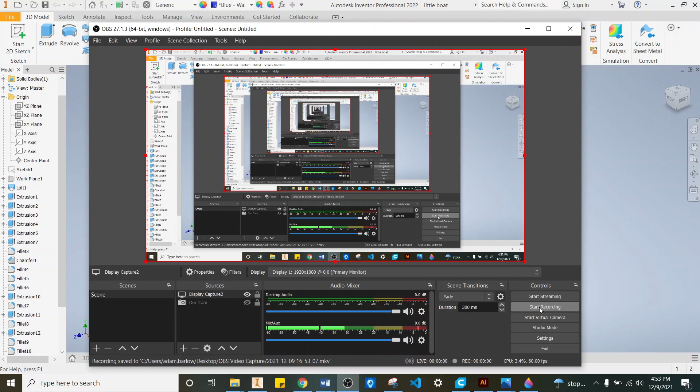All right, so this is step 3 in the 3D modeling project, or the 3D print project. I've made a little blue tugboat in Inventor, and I'm going to make this pretty small. It's about 2 inches in length, so it's just like a little knick-knack.

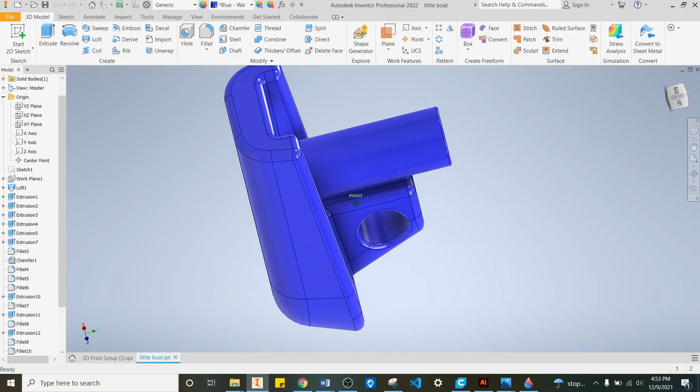So we're going to go File, New, and start a drawing. Just real quick, I'm going to make my mouse a little bit bigger for you.

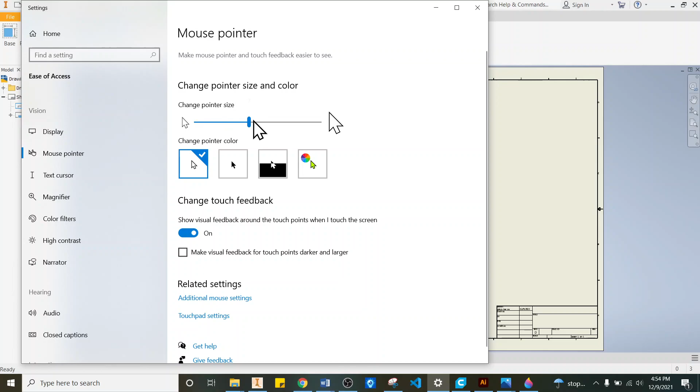Okay, so I've got this sheet that's defaulted here. It's automatically going to open up a size D, and that's way too big for what I'm doing. So what I'm going to do is go over to the left here in the model browser, right-click on Sheet 1, and say Edit Sheet. I'm going to change this from size D to size A.

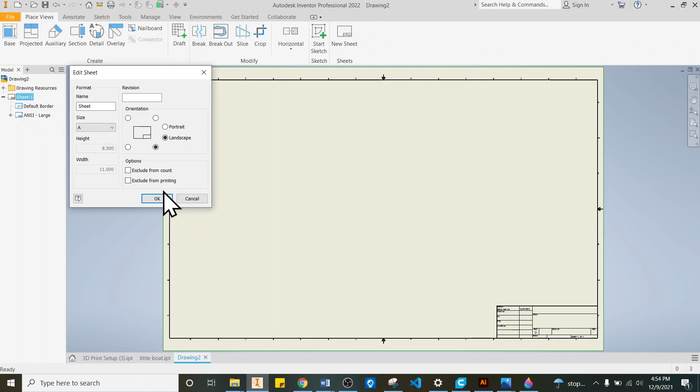I'll click OK. Now I've got this title block down here. We really should use this more often, but for today we're just going to ignore it. I'm going to right-click on ANSI Large and say Delete, and that'll get rid of it. This gives us more space to work with. Down the road we'll focus more on using the title block.

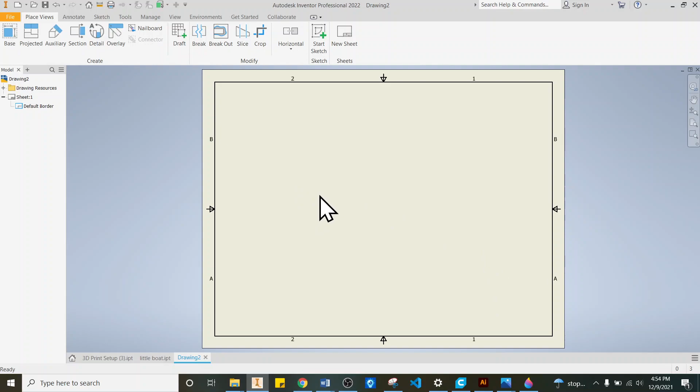So first thing we're going to need to do is click Base. We click the base, and this little view pops up, and it will default to the center of the page. Before I do anything else, I want to put it down here in the bottom left corner. This is going to be our front view, and I want to make sure it fits right there.

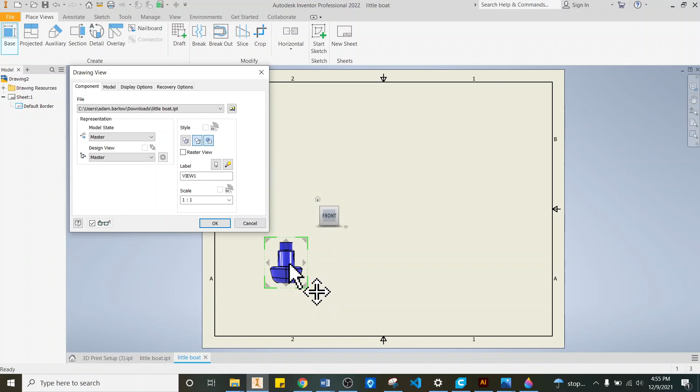For this design, I don't want the wireframe showing all the hidden lines. I want this to be solid and shaded. This will keep the colors, and because we're not printing this, it's okay to have color. We're just going to be submitting this online as a PDF, so why not make it look nice?

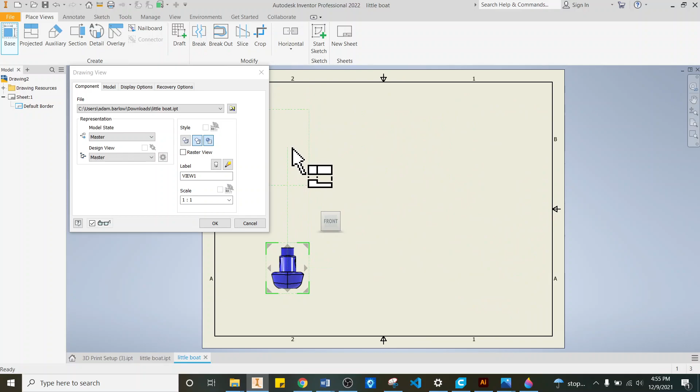So down here for the scale, I'm going to figure out what's best. Sometimes you can't really tell until after you've placed the other views, so I'll leave it at 1:1 right now and see what happens. I come up here, notice how this little box follows my cursor. I'm going to click 3 times to place my top, my isometric view, and my right view, and then right click and say OK.

So that brings up all these views. They fit, but they look a little small. I think I could make these a little bigger. This view down here, my bottom left front view, is my anchor view, so if I change this one, the others—excluding the isometric—will change with it.

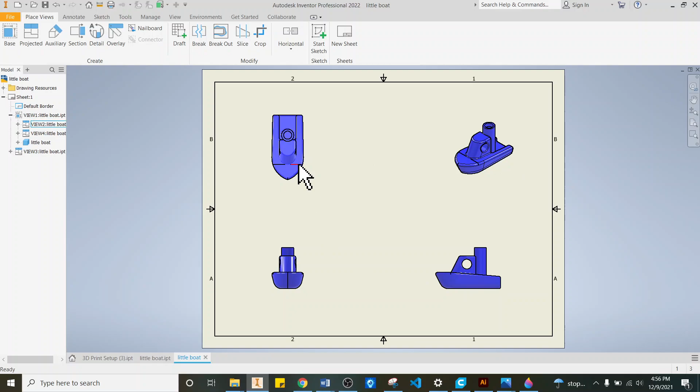So I right click, say Edit View, and I want mine to be, let's say, 2 to 1. I'll click OK—that's pretty big. I think we can make this work though. We're not going to use a ton of dimensions in this sketch, so I think it'll be okay.

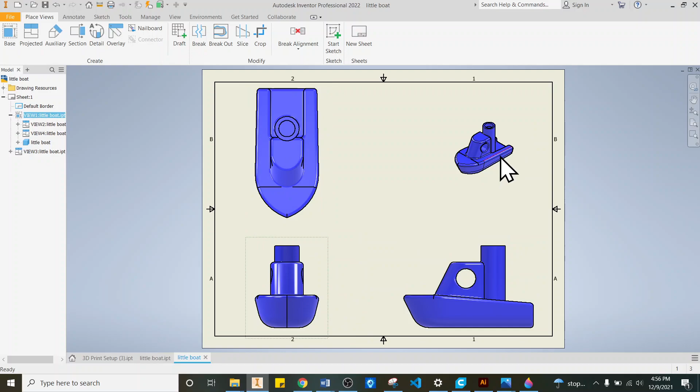That's a little crowded. Then I'm going to change this one—right click, Edit View—let's say 2 to 1. And right click, Edit View, 2 to 1 again. Okay, so I've got these views.

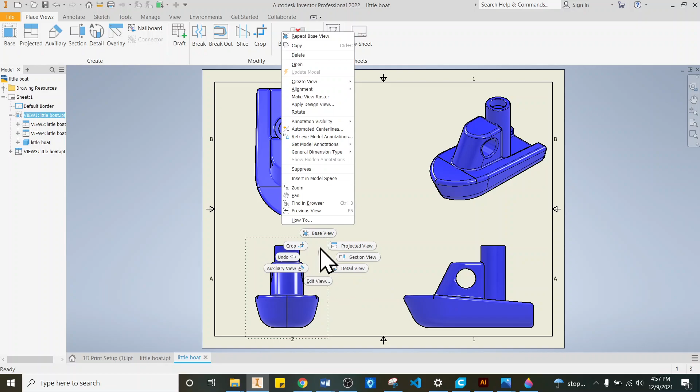On second thought, I think I want to make these a little smaller. So I right click and say Edit View, and if I want something between 1 to 1 and 2 to 1, I can just type in a decimal. I'm going to say 1.5—that's kind of in between. Click OK. So this means it's 150% of the original size.

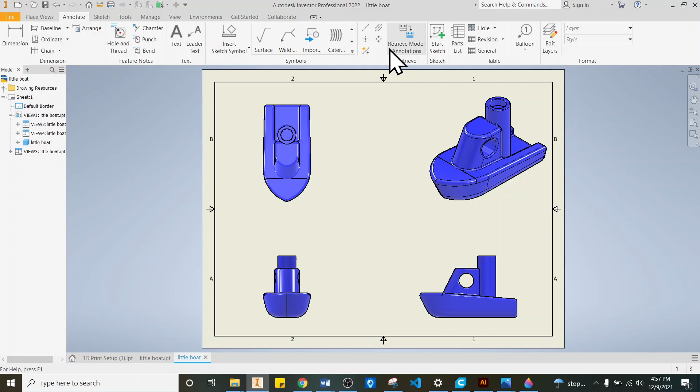Okay, so I'm going up here to Annotate, and the first thing I want to put on here are all my center lines, center marks, and centerline bisectors. I'm going to click my center mark right here, and anywhere there's a circle, I want to zoom in and put that right here so it makes a little crosshairs.

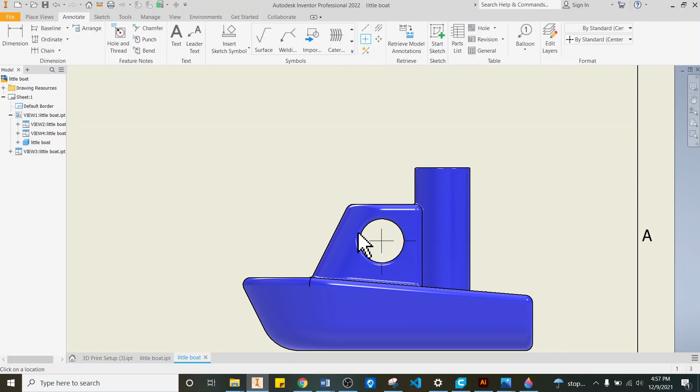I don't need to put it on my isometric view, but I do need it over here. So I'll click right here, and right there—I guess I had to do it twice on that one.

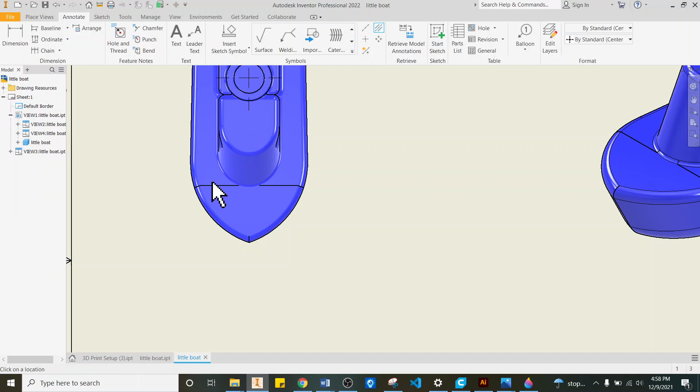Okay, so then centerline bisectors—I'm going to click this one. I don't need this on every spot, and I don't know if it'll let me on this one. No, it won't, so I'll just ignore that one. But I do need it here, from here to here, and that's going to show that this tube, the steam pipe, is shelled out, so it's kind of hollowed out right there.

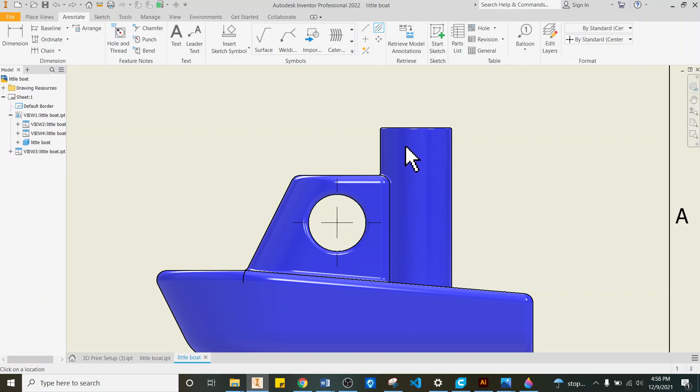Actually, I think I went too far there. Let's try that one more time. I'm going to come in and select that line and that line. Yeah, it's the same thing. Okay, right click and say cancel, escape out of there.

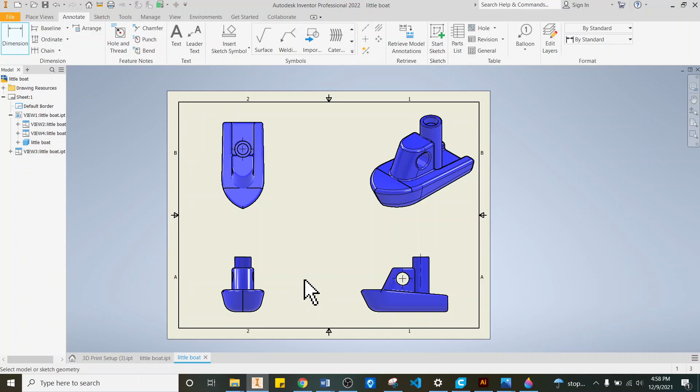We're not going to go crazy on the dimensions, because something this complicated could have close to, maybe not 100, but like 50 dimensions on there. So I'm going to take just my major ones and say dimension, and I want my overall length, height, and width or depth. Those are my three most important ones. I'll click the ones that show those dimensions the best.

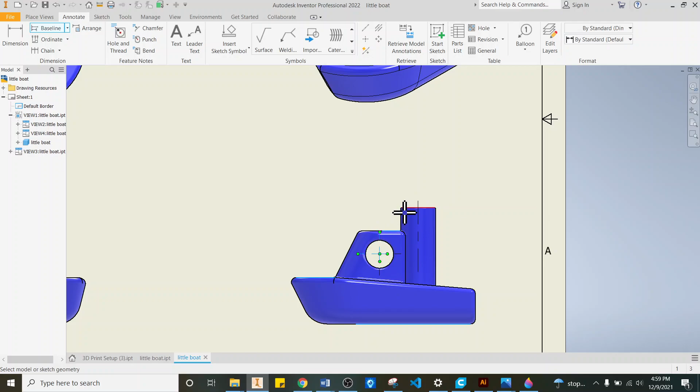This one gives me the best view of the top, or these different elevations. So I'm going to say baseline. I'll click this bottom line right here, then this line. I want to reference this center mark, maybe this roof, and then right click and say continue. And then there's the part we always miss — left click, then right click and say create. That will give you that.

So it's 0.5, 0.75, 1, 1.25.

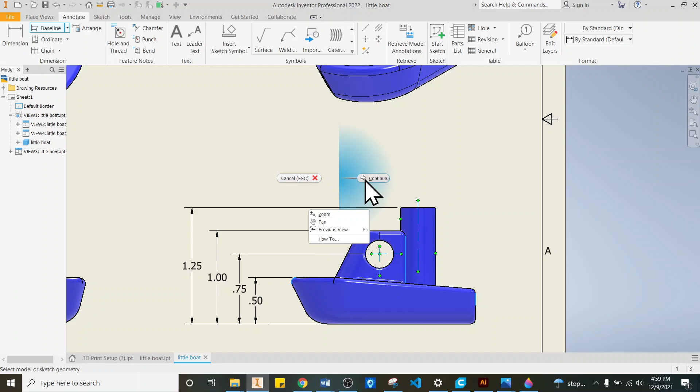Now I'll go baseline again, starting from this back end, and go the other way, clicking all the vertical lines. So 1, 2 — we can ignore that one because it's a hidden line — 3, 4, and then maybe this right here. I'll right click and say continue, then left click, right click, create. I don't know why I clicked there.

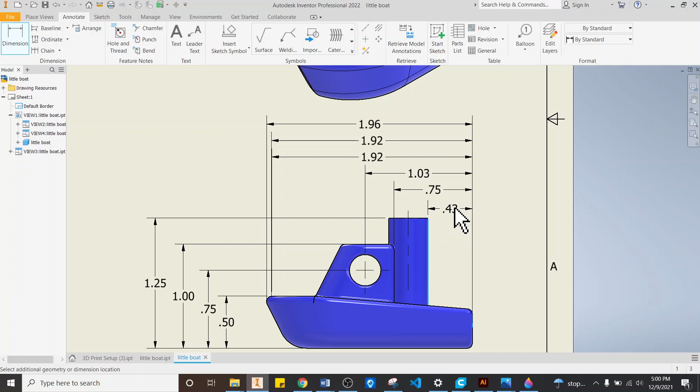If I want to delete this one, I can right click on it and say delete. I can go back to dimension and add in the one that I missed, which is right here, like that. Okay, that looks pretty good for that view. I'm glad we made these a little smaller, because that would have been a lot of dimensions to put in one spot.

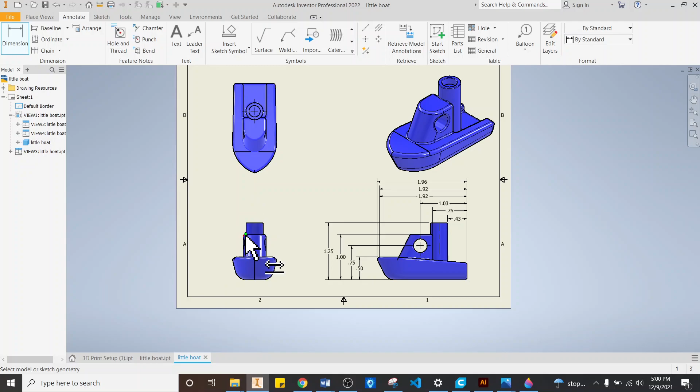Okay, next little bit here, we don't know the width of the boat, so I'm probably going to use this view. Well, maybe we'll use this one because it gets narrower towards the back. So I'm going to say dimension, click that point and that point, drop that there. Okay, dimension — here and here. Actually, I've already made a mistake here.

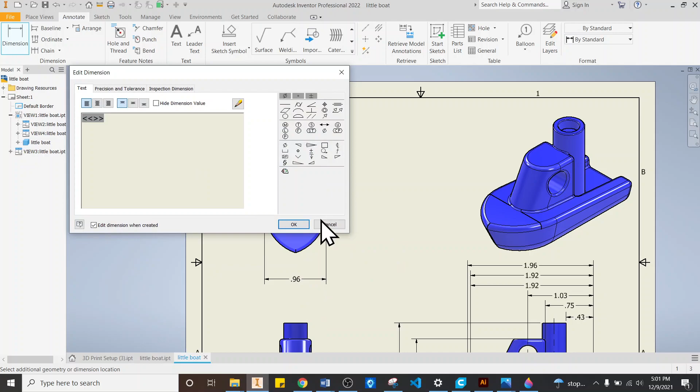I need to put these in between views as much as possible, like that. So that just shows it gets slightly more narrow as it goes back. Yeah, that looks pretty good. All right, and then you've got the height right there. We've got the width. We don't have — oh no, we do. We've got the length of the boat right there.

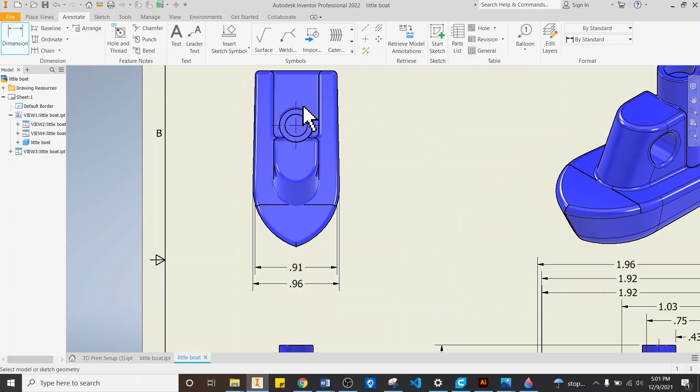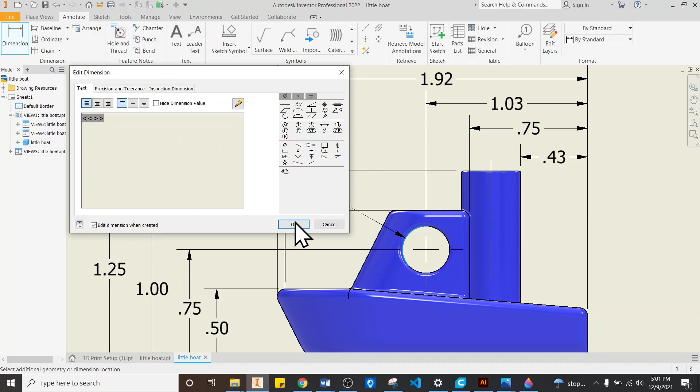So the next thing I'd worry about is probably the diameters. I'm going to say dimension, and anywhere there's a circle like this, I want to put in the diameters. Click OK. Pretty awesome, and I think we're good on this one, but I do need one right here. So click here, and I'll bring this out as far as I can, like that. I'll say OK. Okay, I think that's pretty good.

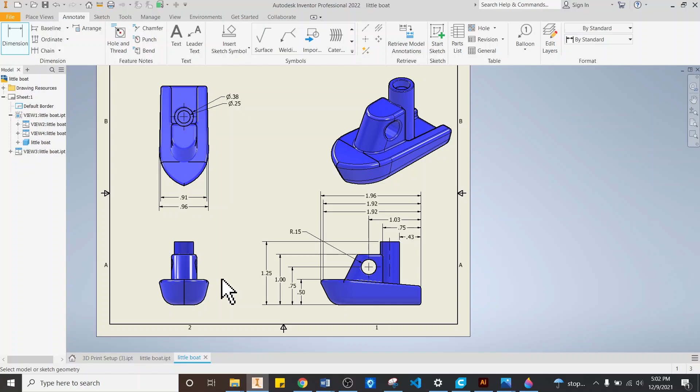Realistically there's still a dozen, tons of different dimensions we should include here, but because there are so many fillets and chamfers and angles, we're going to ignore them since there's a lot of information and we don't want to overwhelm the sketch, or the students. So we'll just call this good. As long as you have about 5 dimensions, and 3 of them describe your overall height, width, and depth, you're just fine.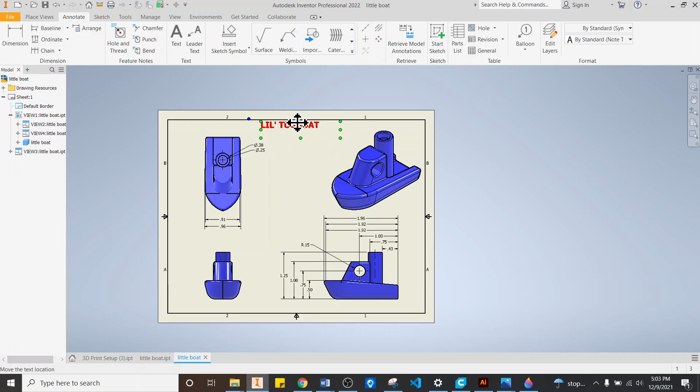Then I can move this around however I want. I could put it in the bottom left if I wanted — it's just a matter of preference. I kind of like putting it up near the isometric, but it's up to you. So I'm just going to put it right there in the middle, narrow the text box, and center it.

Cool, all right, so that would work for this assignment. Once you've got that, you can click File, Save. Save it somewhere safe — I've got mine in downloads because I'm going to delete this, but you'll want to save it to your student drive. Then you'll go File... come on... File, and we're going to say Export PDF, and save it as whatever it is. Click Save. Then on the assignment, go ahead and submit it.

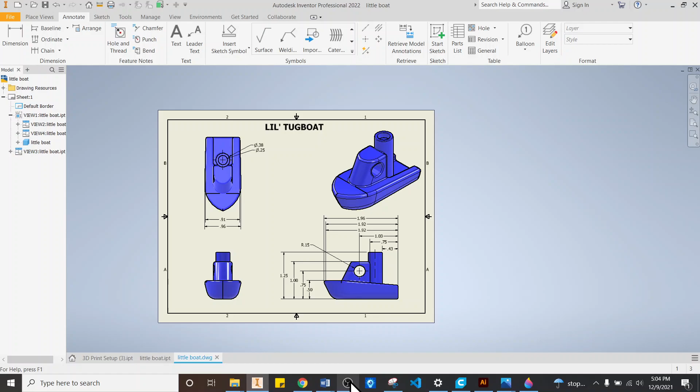And that is a wrap for the CAD drawing, the multi-view CAD drawing. So if you got that in, you can turn it in, and that's it. Good work.